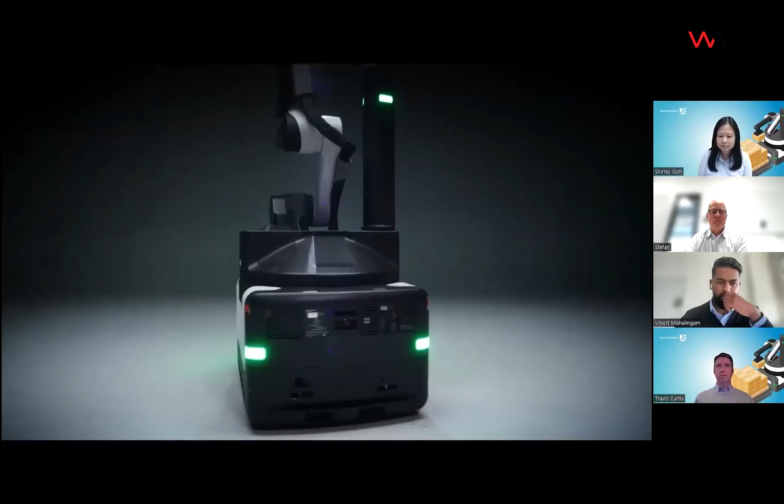Stretch is our first robot that's really purpose-built for the warehouse. It moves cases all day long, it doesn't get tired, and it doesn't get injured. The Stretch's morphology is a mobile base with a capable drive system to move in any direction, which houses the compute and battery power to control the whole robot. On top of that, we call the turntable, which carries the robot's arm, a perception mast, and the vacuum system. The whole system was designed together. It's not an arm bolted onto a base. It's really a single robot.

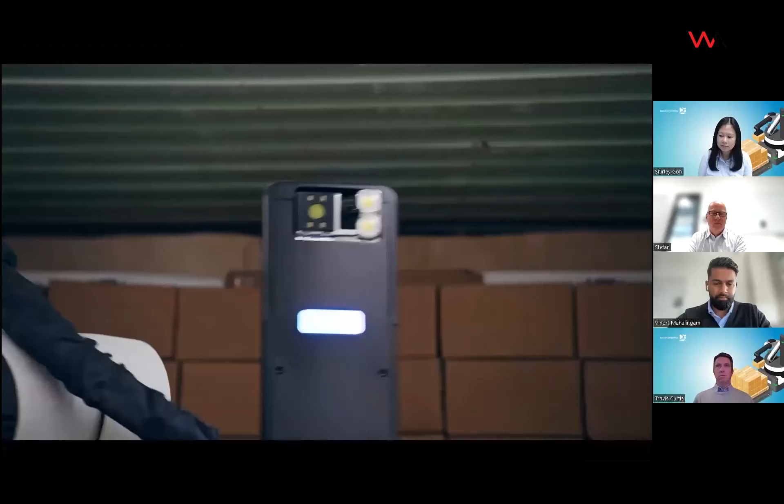The other thing that makes Stretch special is that it's able to understand the environment and make its own decisions about what to do next. The robot's really aware of its state and the state of the world around it, and it's reacting even as things unfold away from the ideal. Stretch is our...

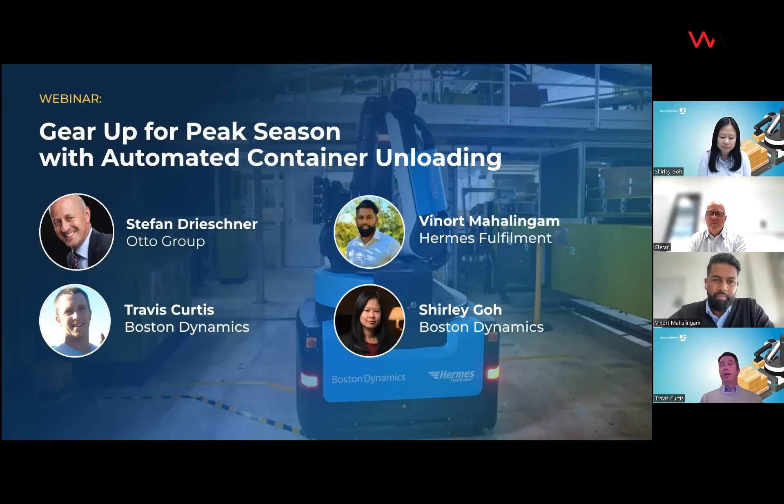So you might be wondering why automated container unloading. Let's consider these numbers. In 2022, there were 126.9 billion packages shipped globally, and that represents an enormous opportunity for automation and increasing efficiency. Automating jobs like container unloading can also help us keep up with demand, since global e-commerce revenue is expected to grow by 2027 to $5.5 trillion.

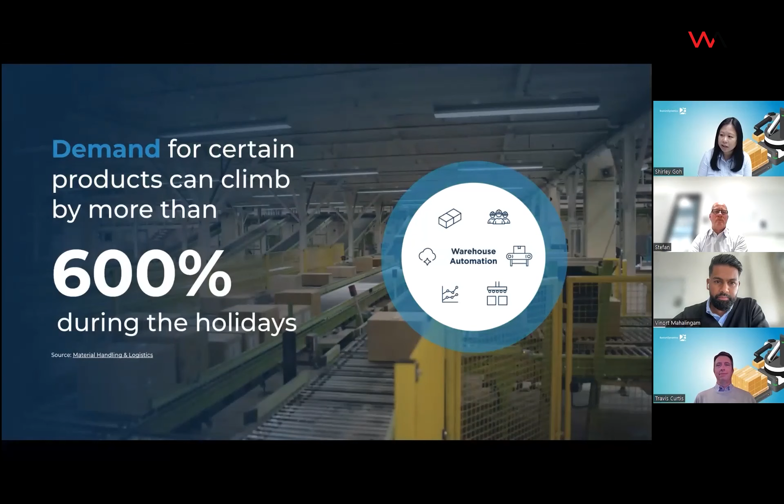And while we're speaking about demand and fortifying operations, I wanted to touch on this statistic that states that demand for certain products can climb by more than 600% during the holidays.

Safety is another driver when it comes to automating container unloading. The U.S. Bureau of Labor Statistics says that the number of non-fatal work injuries in transportation and warehousing in 2022 was over 255,000. Also from the U.S. Bureau, in 2020, the number of injuries in transportation and warehousing that were overexertion in lifting and lowering, involving days away from work, was nearly 12,000.

So automating technology is also a useful recruitment and retention tool. Modern Materials Handling stated that warehouse workers who would consider a pay cut at another company for an opportunity to use technology that would help them in their jobs was 74%. That same article noted workers said they're physically spending over a third of their day walking, and would welcome technology's help in the form of robots or other tools. It also mentioned physical strain as taking a large toll on workers, the leading cause being carrying and/or lifting, followed by walking and/or traveling.

So automating the process of container unloading can address many of those situations. For that, we have our mobile case handling robot Stretch. Here's a video to introduce Stretch and what it can do.

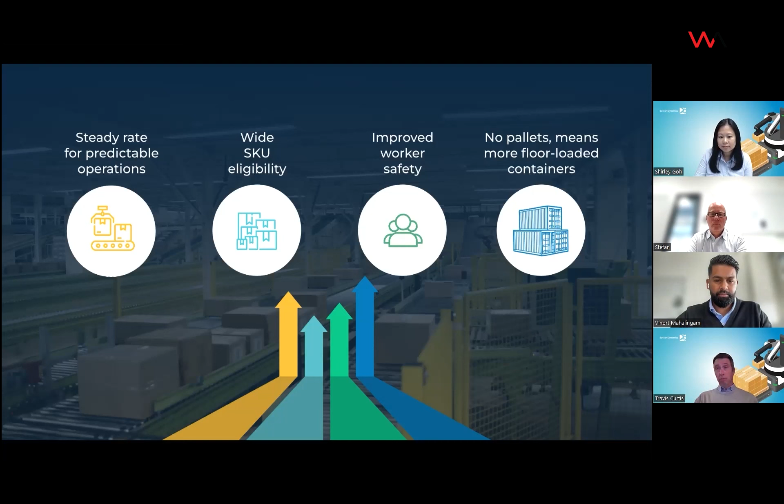It's nice being here today with Otto and Hermes Fulfilment. We work with a lot of different customers in a lot of different vertical markets, but I will say apparel, dealing with clothing and shoes, is a particularly great market for Stretch.

Typically all those containers are going to be floor loaded. They're going to be very tightly packed, meaning there's very little space between the boxes, almost no space between the ceiling and the top of the box, as an example. And as you get into different seasons of the year, those boxes can be really heavy. So now you have an operation that has to unload a lot of containers that are very tightly packed.

Heavy boxes are over the associates' heads, and they're having to pick them up from awkward angles. That is something Stretch is particularly good at. Stretch can pick up about 23 kilograms in weight, and we're doing things to constantly improve how fast we can unload those containers.

I think you saw in that previous video that we can multi-pick some of those containers. And just like with an associate or an employee unloading a container, you're not having to tell Stretch what's inside, you're not having to tell it these boxes are going to be here, they're going to be of this weight, or this many SKUs. Those are all things it does autonomously.

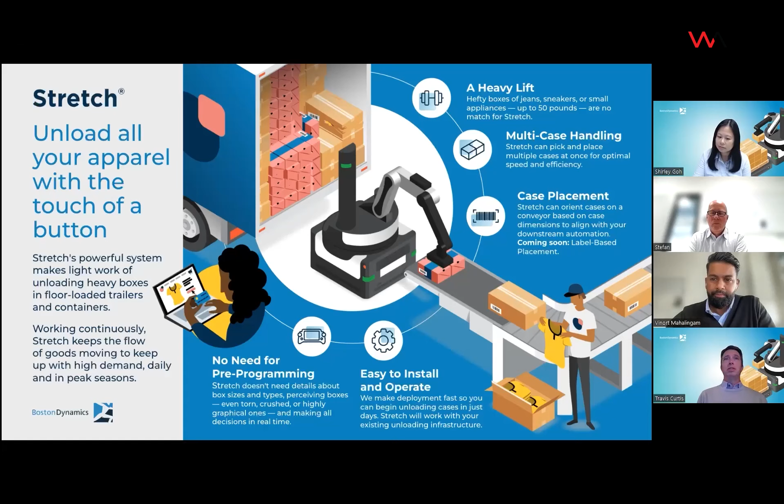Before we get into it more with our guests, let's go and take a look at Stretch on location at Hermes Fulfilment in Haldensleben, Germany.

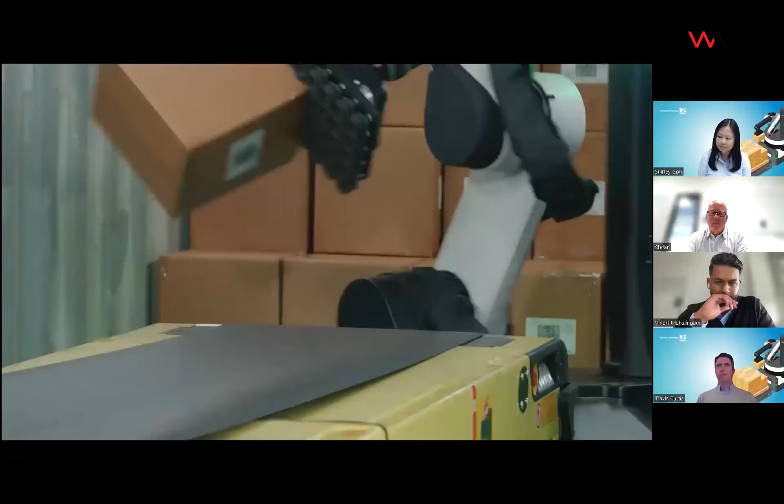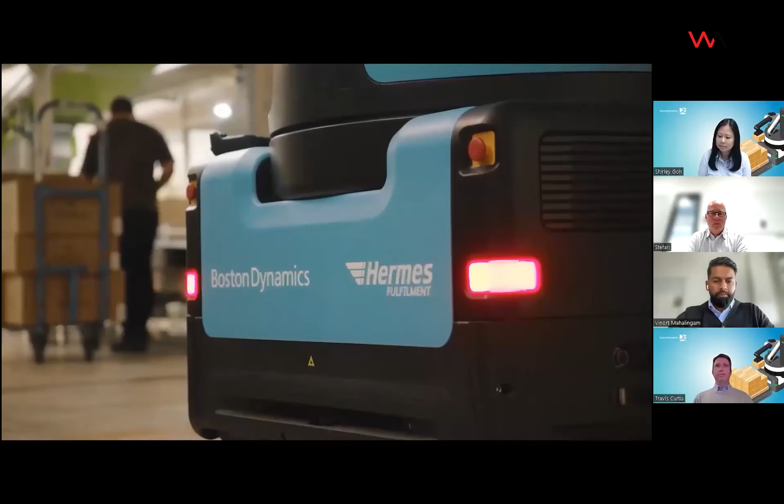The Otto Group is actively shaping the future of logistics on an ongoing basis, and being the first company to implement Stretch in our warehouses proves us that we are on the right way and shows the power of the strategic partnership between Boston Dynamics and the Otto Group.

It is our goal to strengthen our logistics processes by increasing operational efficiency and making warehouse work more attractive, and technological innovations and automation, just like Stretch is, a great tool towards this goal.

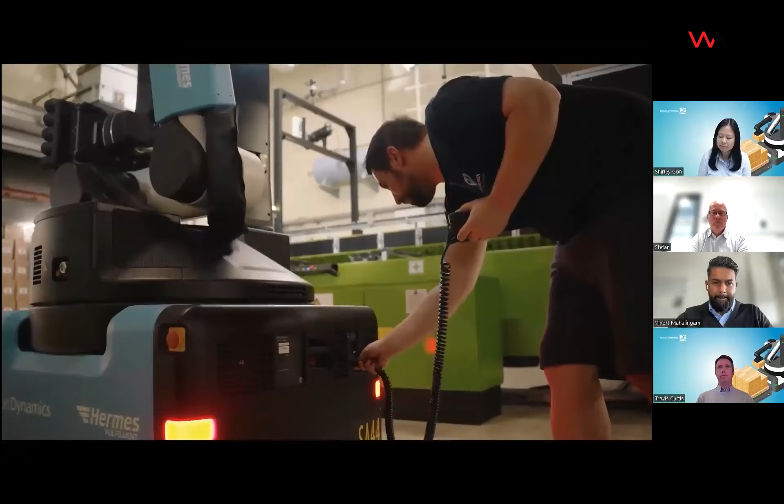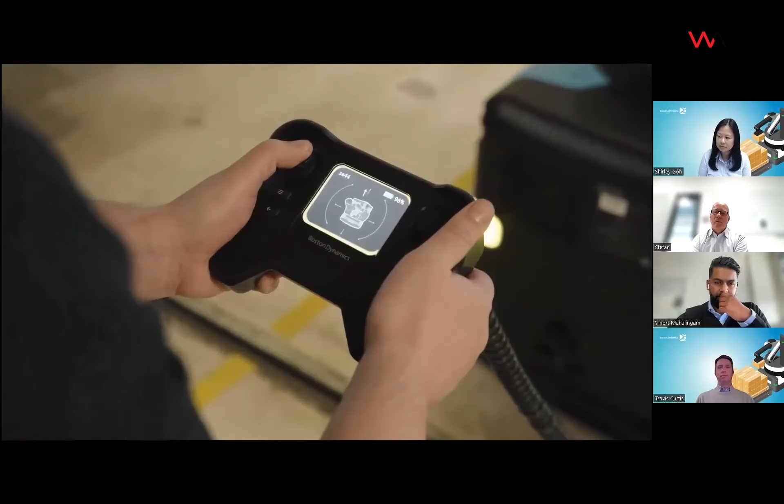Stretch is a mobile case handling robot for the warehouse, and it can unload sea containers and trailers that have floor loaded boxes. Everything is on board the robot itself. It doesn't need to be connected to power or tethered to any airlines. It has everything on board that it needs to operate inside of a container.

All an operator needs to do in order to start a workflow is drive the robot into place, go over to an operator tablet, press play, and Stretch does the rest.

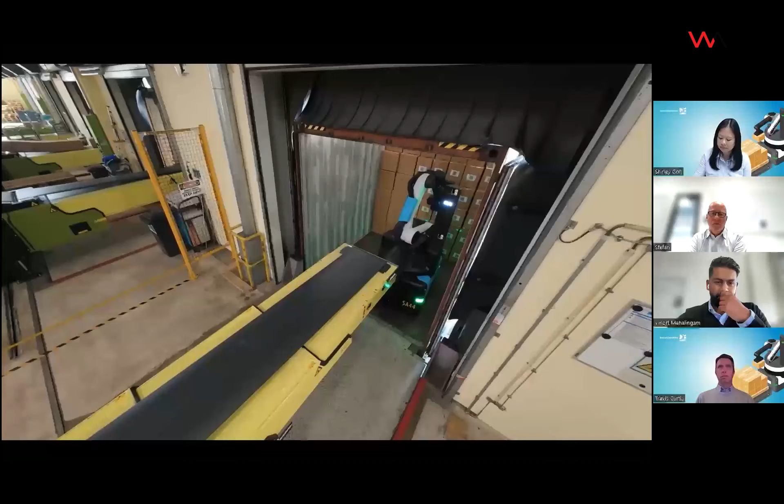The performance and productivity of Stretch in the first weeks is really outperforming our assumptions we had in the first place.

Back to you, Travis. Yeah, great. And so, thank you, Shirley. And so this is what you're seeing here is an actual image of our deployment at Hermes Fulfillment.

So you can see that. And kind of the point of this is to show or to talk about when we come in to deploy a robot, we're not just bringing a robot, we're bringing in a complete solution.

And that can mean the interfaces that your associates interact with. And it also means the safety system to protect your employees while they work around the containers. And so you see a few of those components here.

And since it is a flexible automation solution, there's actually very little fixed infrastructure at all. You see an arch over the conveyor. And if you look down in the middle, you'll actually see a yellow, kind of a small yellow box.

That's the LiDAR. That's the virtual guard that we use so that if somebody gets too close to the container while Stretch is working, Stretch will either slow down or stop working completely. So again, it's seamless, very little fencing involved in this interaction at all.

But additionally, we're installing controls so that Stretch actually interacts with the conveyor wirelessly. So as your employees will then pair the Stretch robot to the conveyor itself, and then as Stretch begins its workflow, it'll actually control the positioning of the conveyor.

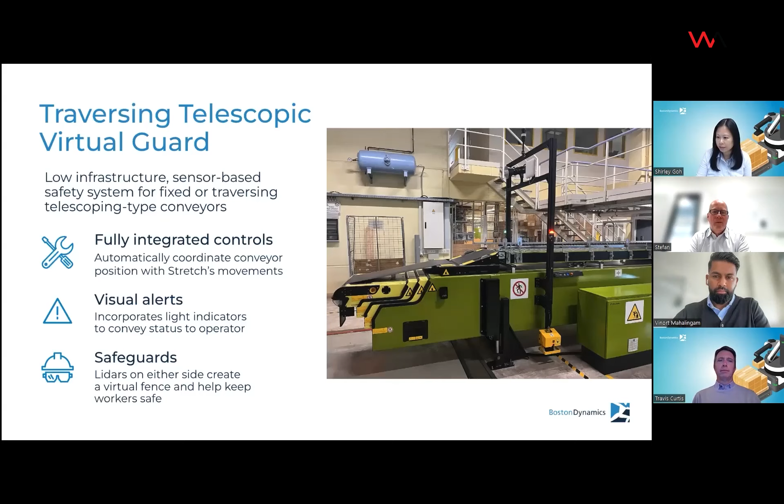Let's hear from our guest speakers a bit about the Otto Group and Hermes Fulfilment. Stefan, why don't you go ahead? And you are on mute, Stefan. Thank you, Shirley. Before we start to get more in details, I think it's good to give you a short overview on the Otto Group itself.

Just to give you an idea of some brands and companies here, we of course see Otto, Bonprix, and Witt and About You in the German and European market, plus FGH, which is also a brand currently active in the UK, plus in the US mainly Crate & Barrel and also Venus in the fashion segment.

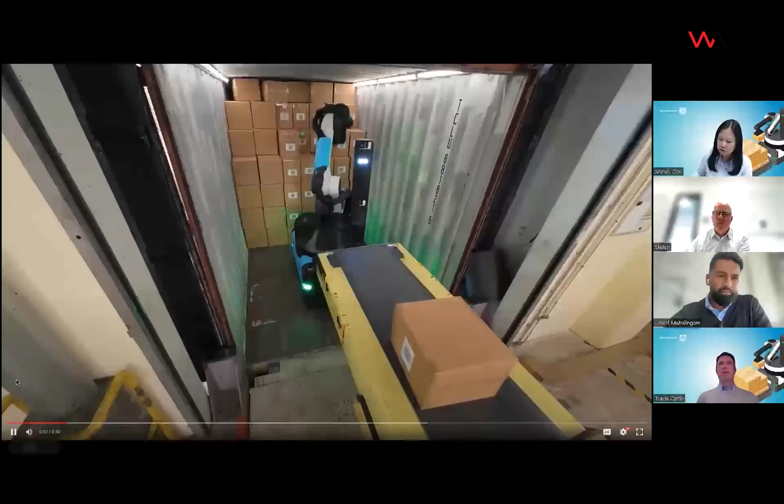So Travis, we're going to switch back to you to talk about a feature that's been essential at Hermes. I think it's great to see stretch in action, and when you watch it do these smooth moves, you can really see the effects of having a fully integrated robot.

In this case, we're unloading a container for Hermes Fulfilment, but it's very important that the boxes are on the conveyor in a certain orientation. So stretch is actually looking at the dimensions of the box and putting the box perpendicular to the flow of the conveyor itself, which puts the labels on the sides.

As we talked about earlier, we want to unload in the same manner you were doing it before we arrive, we just want to automate it. By putting the boxes in that orientation, we switched this feature for Hermes Fulfilment. It didn't take very long, and pretty soon after we arrived, this is how we're orienting the boxes, so they did not have to adjust their scanning systems to read the boxes as it enters their downstream automation.

I'll just also note this is where you start to see that wireless connectivity between Stretch and the conveyor. So it may not look like it, but Stretch is actually controlling the conveyor right now during that process.

In addition to Stretch, we have another robot in our portfolio, our quadruped robot Spot. The Otto Group has the distinction of deploying both Stretch and Spot. It's a really great partnership, particularly around the fact that they're working with all of our robot platforms, including Spot and Stretch. If you're going to integrate mobile robots and work around your associates, it's great to get them introduced as widely as possible, and the Otto Group really embraced that.

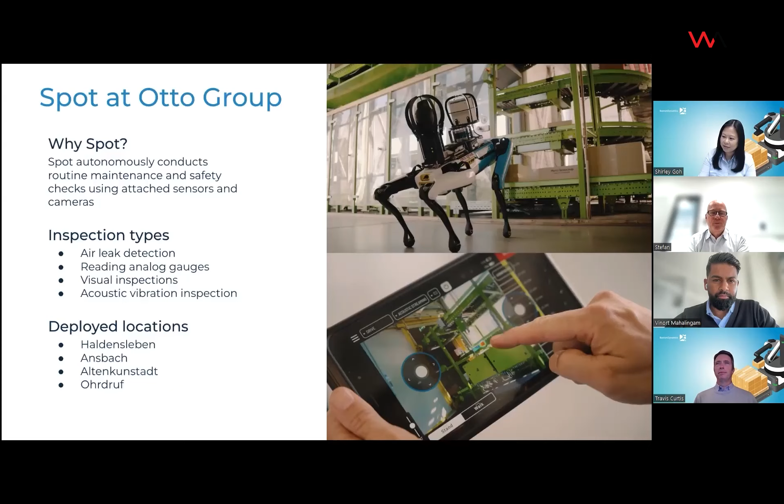Glad to hear it. Thank you, Stefan. Let's talk next about training for Stretch.

Kind of getting back to that messaging that we're not bringing in just a robot, we're bringing in a complete unloading solution. That includes training your people to operate Stretch. A lot of thought has been put into how associates interact with Stretch, how they're able to start a workflow to make it as step-by-step and intuitive as possible. Our CEO has always said from the start, and it's kind of his mantra, that Stretch has to be a tool, like a hammer - meaning it has to be easy to use and effective. We've really spent a lot of time working with our customers to bring that to light.

We're typically only on site for a full deployment for about 2 weeks. We don't have to have a select group of employees to train to run Stretch. The people who are unloading containers, we train them to run Stretch, and now they're empowered to run the robot.

We get great reactions from that training. They'll be running Stretch in less than 2 days. Then typically we'll take another couple of those employees and spend 2 days giving them robot certification, meaning they'll be able to train new employees, or employees from different parts of the company, to run Stretch as well. It's something we're really proud of, and it's not a great flexible automation solution if it's not easy to use or if people do not use it. I think we've accomplished a lot of our goals that way.

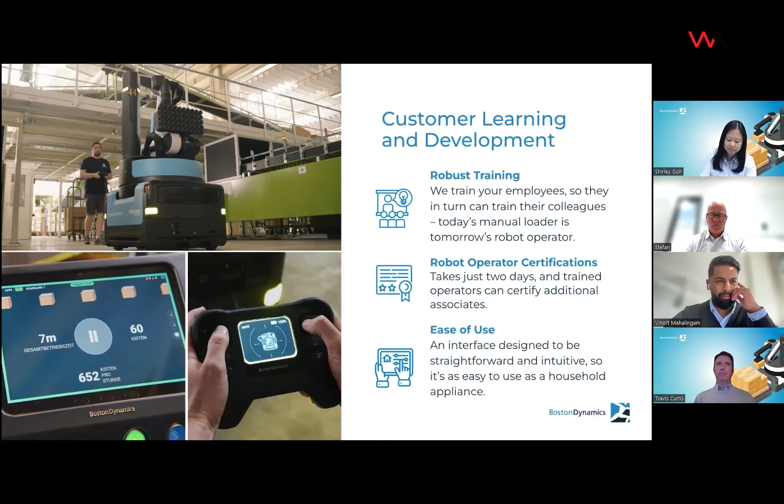Now we're going to take submitted questions, some submitted in advance and some live. Stefan, I'll ask you this one first: does Otto have plans to roll out Stretch across new sites within your logistics network?

Like Vino said, the first implementation was very successful and met all our expectations, so of course we are planning to implement more than just this one solution here at Haldensleben. We will continue the implementation at this specific site, in the inbound area, going for another 4 units next year, 2025. Beside that, we are planning implementation of 2 robots in separate buildings at the same location, for unloading containers but also swap bodies, which is a new challenge as well. This will be very interesting to see how that works together with the Stretch robot.

Furthermore, we are planning to implement up to 2 Stretch robots at our second site. We operate 2 sites at the Haldensleben location for the same job, to unload containers and swap bodies in our replenishment process. Last but not least, coming up in 2025 is the implementation of 2 units in our one-man handling business logistics center at Otto, and also in our Hermes Germany network. There's a proof of concept scheduled for next year in the logistics center near Leipzig for unloading swap bodies as well. So that's the plan for next year.